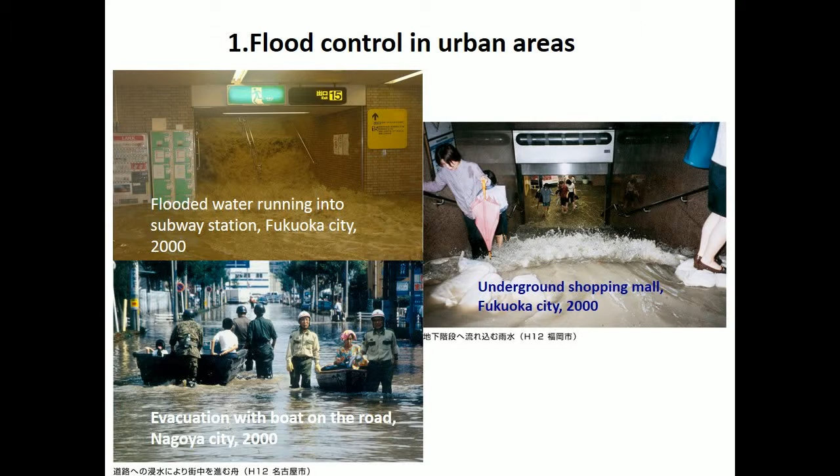In this video, you will find 9 major challenges and their solutions on wastewater works in Japan. The first challenge is the flood control in urban areas. These photographs show recent typical damages by urban floods. Underground facilities are easily damaged by floods, such as subway stations and underground shopping malls. Due to the increase in extreme weather events and in urban concentration, the magnitude of flood damage is rising.

Comprehensive measures are now being pursued to help the situation. They are a combination of structural, non-structural, and self-help measures. Structural measures include improvement of storm sewers, construction of storage, and infiltration facilities. Non-structural measures, as examples, are real-time flood forecast and flood maps for citizens. They work well with the self-help measures. They include voluntary evacuation and self-sandbagging around private properties.

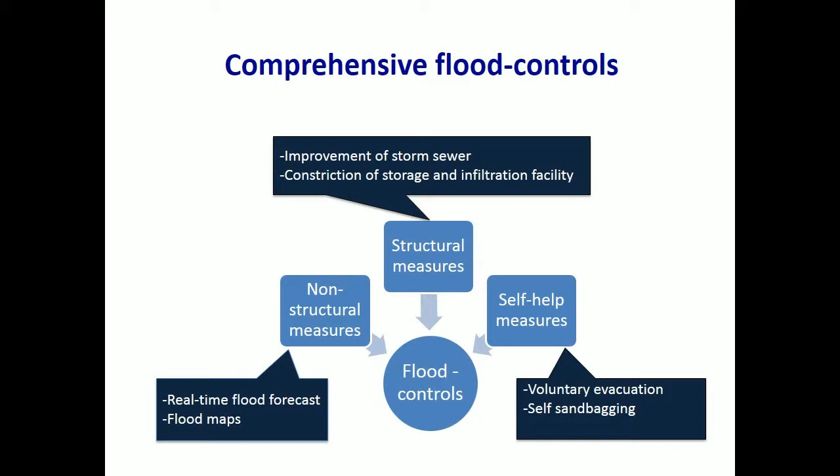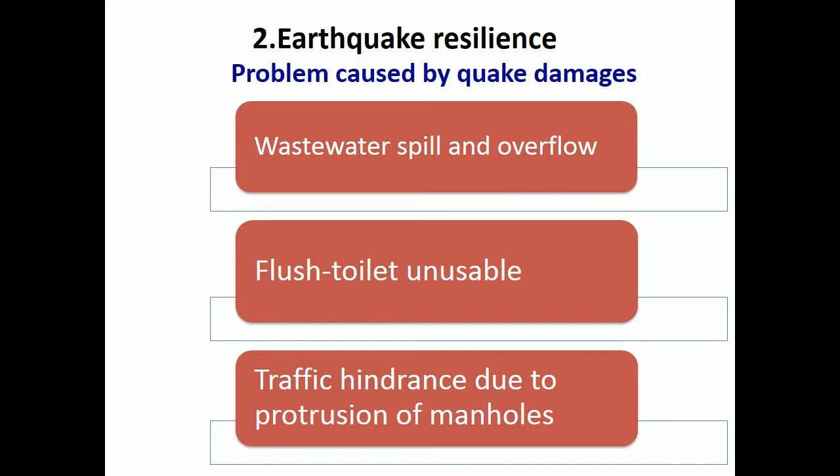The second challenge is the increase of earthquake resilience. Japan is prone to strong earthquakes. Once wastewater systems are damaged, the impact can be severe. For example, a damaged sewer system causes wastewater spill. It runs into residential areas or public water bodies. The situation poses serious threats to public health and sanitation. Also, broken sewers make flush toilets unusable. This leads to severe impact on the health of survivors.

Liquefaction is a common phenomenon after the quake. Manholes protrude on the road surfaces. This results in severe disruption to road traffic. Emergency vehicles are affected right after the quake.

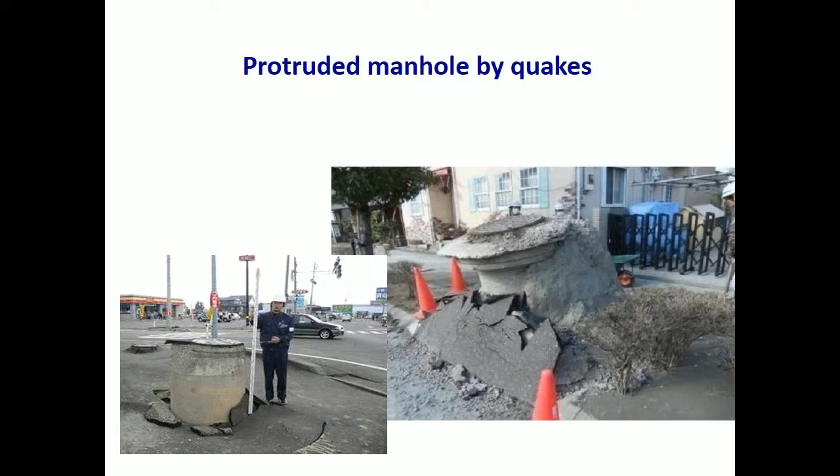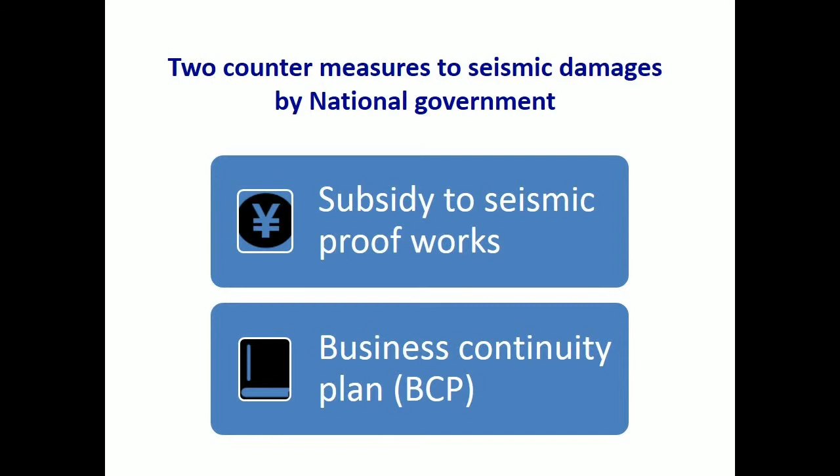For all these reasons, wastewater systems need to be earthquake-proof. The national government is implementing 2 measures to achieve this. Firstly, they provide wastewater utilities with subsidies to fund the quake-proofing works. Secondly, they suggest each utility make a Business Continuity Plan (BCP). It is designed to ensure quick restoration of essential functions of wastewater service.

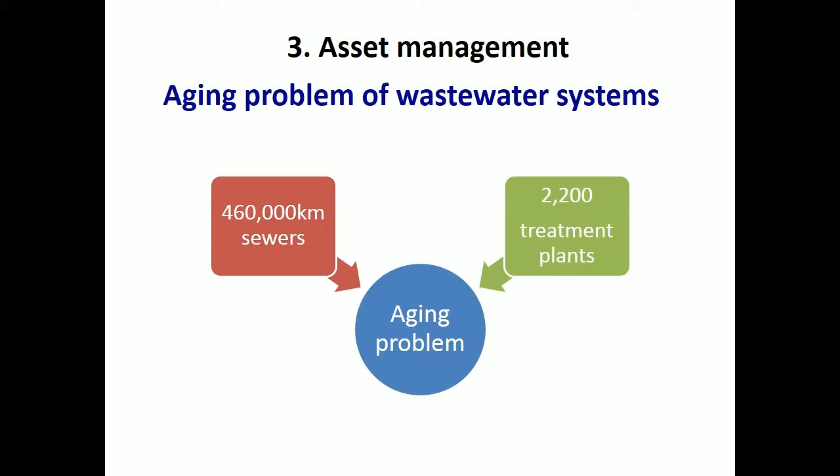The third challenge is implementation of asset management. A total of 460,000 kilometers of sewers and 2,200 treatment plants have been built. Those huge assets continue to age. The failure of aged facilities will pose a serious problem soon, if unaddressed. It is reported that around 4,000 sinkholes are caused by failed sewers every year. These photographs are the examples in the downtown of Tokyo.

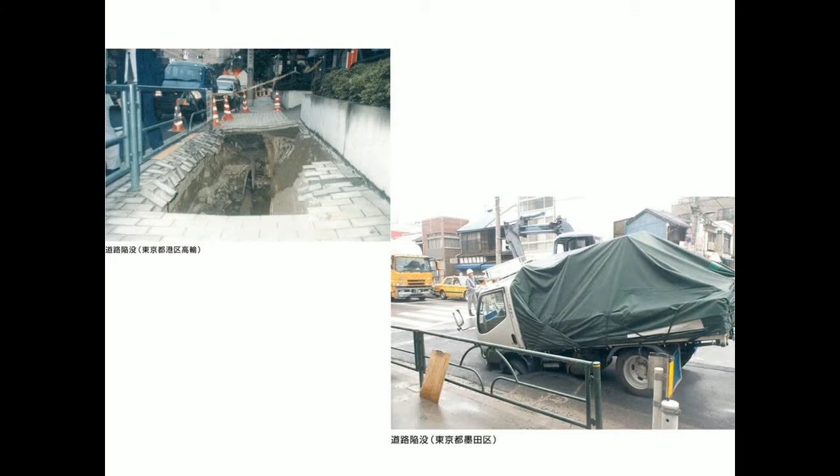To improve this situation, the next 3 points are emphasized. First is preventive maintenance. Second is condition assessment. Third is renovations based on long-term planning. In relation to the preventive maintenance, in 2015, the sewerage law was amended to ensure proper sewer management.

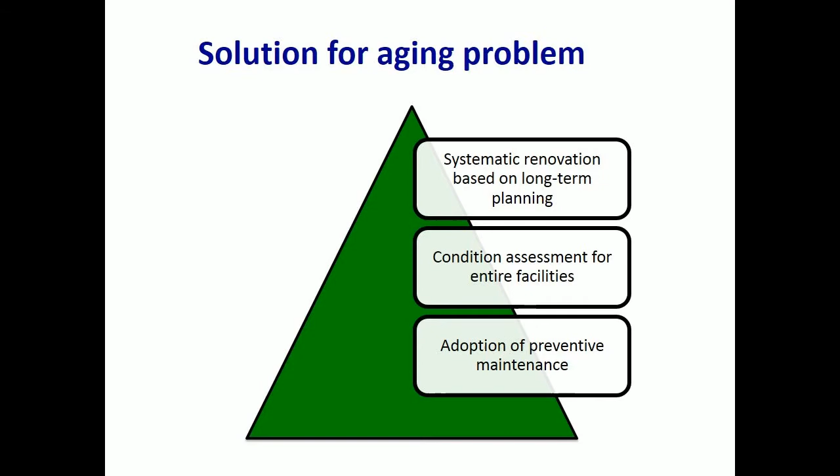The fourth challenge is eutrophication in stagnant coastal and freshwater bodies. The water quality in public waters has steadily improved in rivers or running waters. But there still remain the problems of eutrophication in stagnant waters. The pollution is observed in the bays that Tokyo, Nagoya, and Osaka face. Lake Biwa and Lake Kasumigaura, the 2 biggest freshwater lakes, are also eutrophicated.

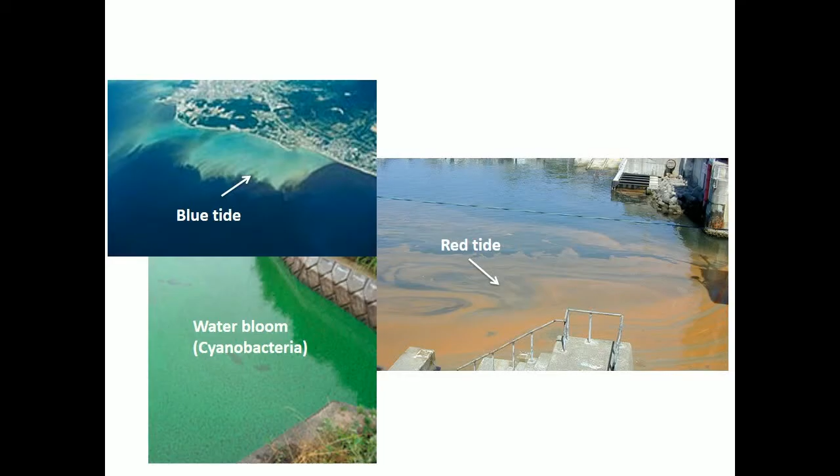These pictures show the consequences of eutrophication: the red tide, blue tide, and water bloom. They severely impact fisheries, ecosystems, and scenic beauty. To halt the eutrophication, nutrient removal is necessary at treatment plants. But the implementation is slow, particularly in the watershed of Tokyo Bay. To expedite the solution, the national government has recommended 2 measures. Firstly, phased introduction of nutrient removal processes. Secondly, joint actions with other concerned offices.

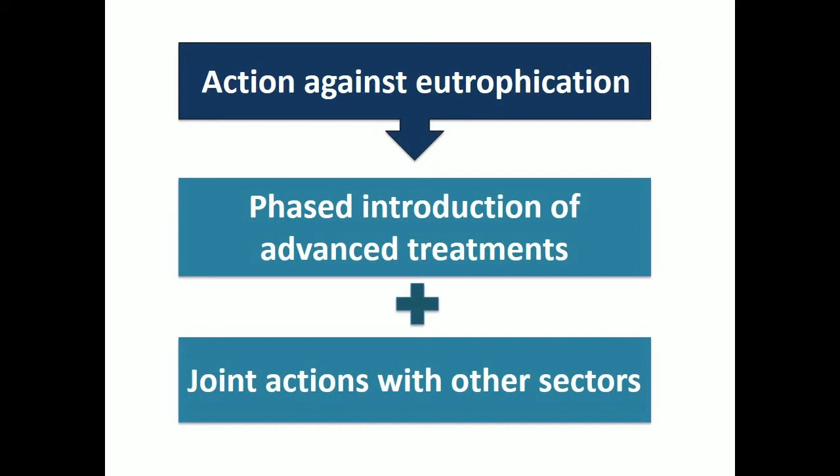This slide shows an example of phased introduction for a nitrogen removal process. It makes minor modifications to an existing conventional activated sludge system. As a tentative treatment method, it utilizes the extra capacity of existing facilities with minor upgrades.

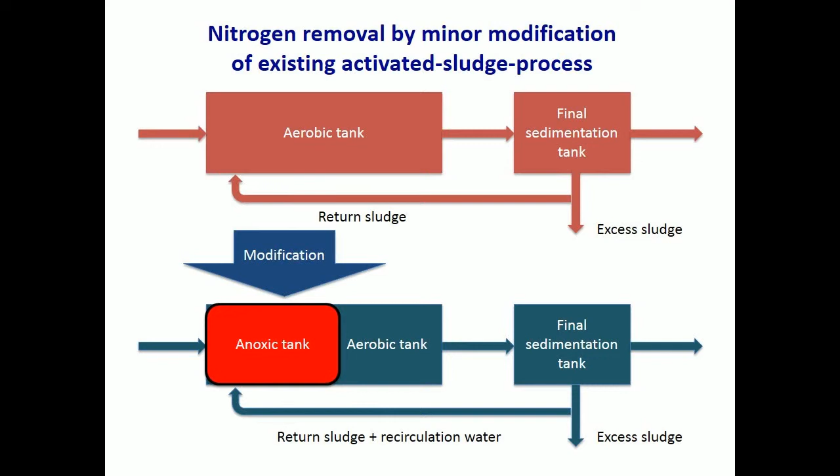The second solution is cooperation with the related government offices. Alleviating eutrophication needs to involve not only wastewater operators, but authorities of other dischargers on point and non-point sources. Especially, for the control of non-point sources, the involvement of the government offices of agriculture and forestry is essential.

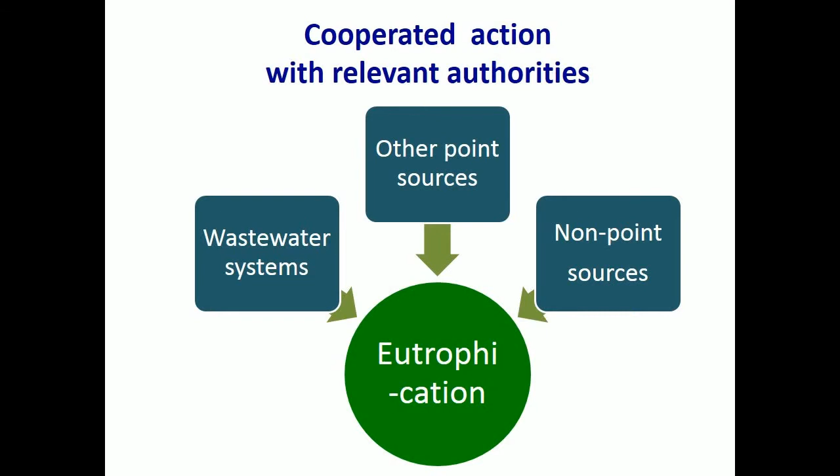The fifth challenge is restoring waterfront. Over the decades, waterfront in urban areas has diminished. The main reason is the loss or reduction of running water from urbanization. The decreasing pervious areas, conversion of urban streams into culverts, and climate change in recent years are responsible.

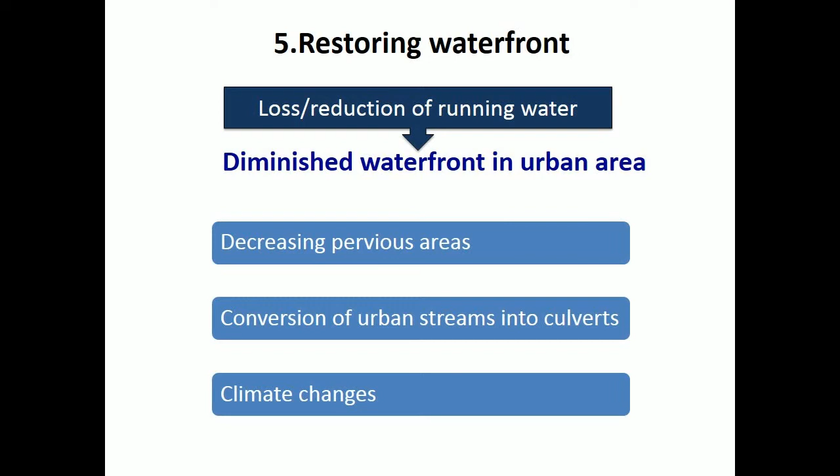To revive waterfront, 3 solutions are implemented to increase the flow of streams. First, the use of treated wastewater. Second, rainwater utilization after storage and infiltration. Third, revival and creation of waterfront with civic participation. Partnership with citizens from planning to operation and maintenance produces good results.

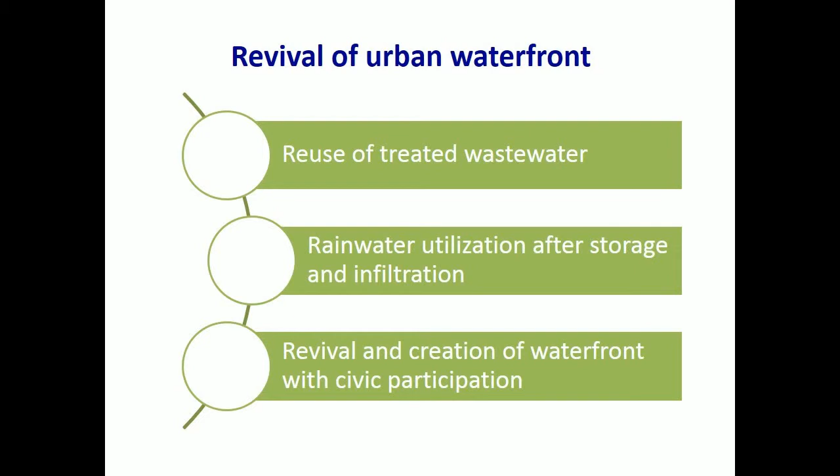The sixth challenge is the improvement of combined sewer systems. The combined sewer system is designed to convey sanitary wastewater and storm water in the same pipeline. It makes overflow of untreated wastewater when receiving heavy rainfalls. It has been used as a low-cost solution in urban areas. It serves approximately 25% of the population. But it needs improvement for protection of public health and clean water environment.

In 2001, oil balls drifted ashore at the Odaiba Marine Park and caught public attention. It is a very popular leisure spot in Tokyo. It was revealed by the media that they came from combined sewers. It resulted in a major social controversy. Since then, serious efforts have been made to improve the systems all over the country.

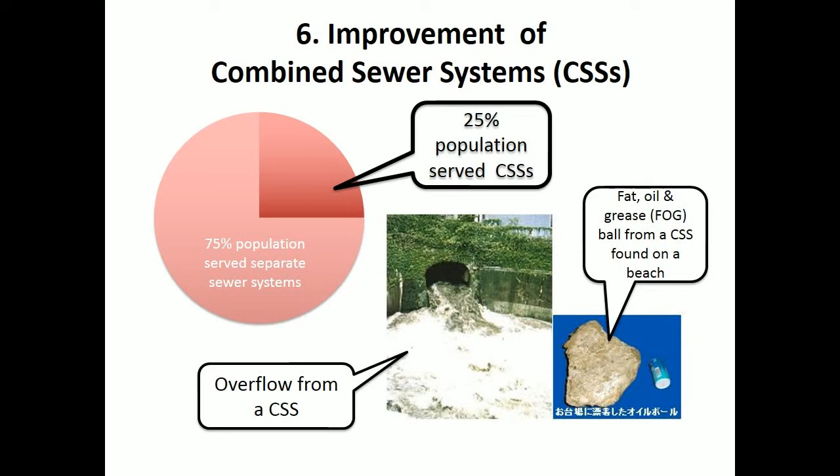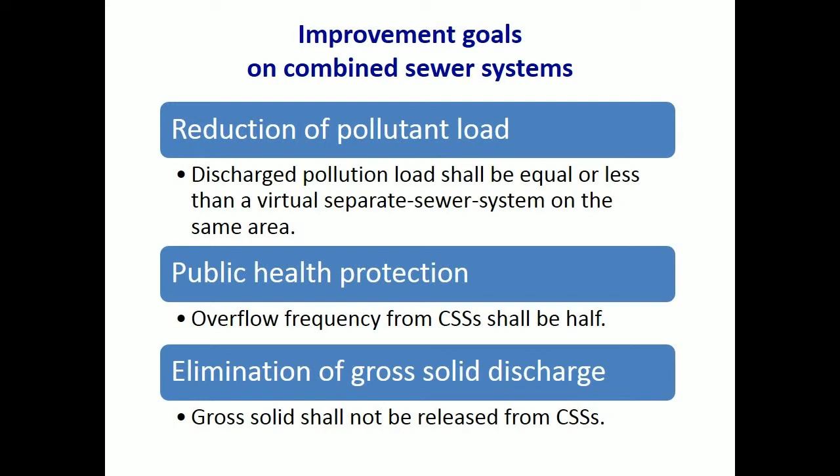The improvement of combined sewer systems has 3 policy goals. First, reduction of pollutant load. The total pollutant load from a combined sewer system shall be equal or less than a separate sewer system, in assumption for the same sewer district. Second, public health protection. The number of overflow events of untreated wastewater shall be cut by half. Third, elimination of gross solid discharge. Gross solids shall not be released to public waters from combined sewer systems.

In 2003, the sewerage law was amended to make the policy goals mandatory by specified deadlines. The deadline for small and medium-sized municipalities was set at 2013. For large municipalities, it was set at 2023. Up to now, 169 out of 170 small and medium-sized municipalities have completed their requirements. 2 out of 21 large municipalities have also completed improvements.

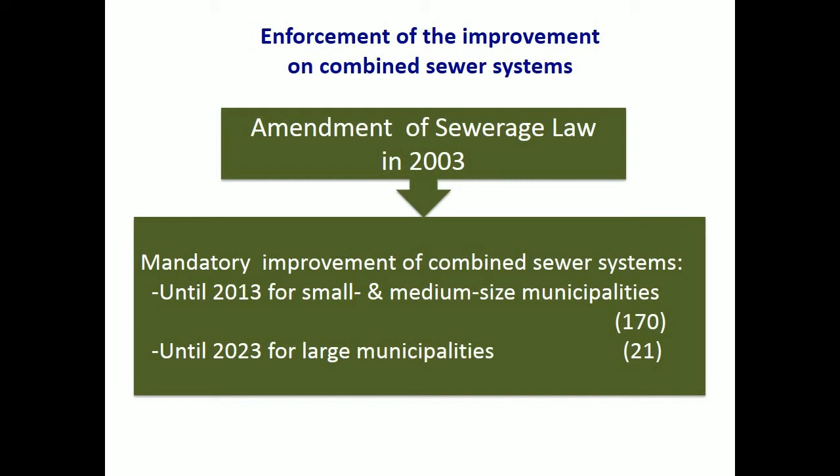The 7th challenge is expansion of service. Currently there are still around 14 million people waiting for access to wastewater treatment services. In these areas, untreated greywater is discharged directly to the environment. It is an urgent task to deliver wastewater service to these areas.

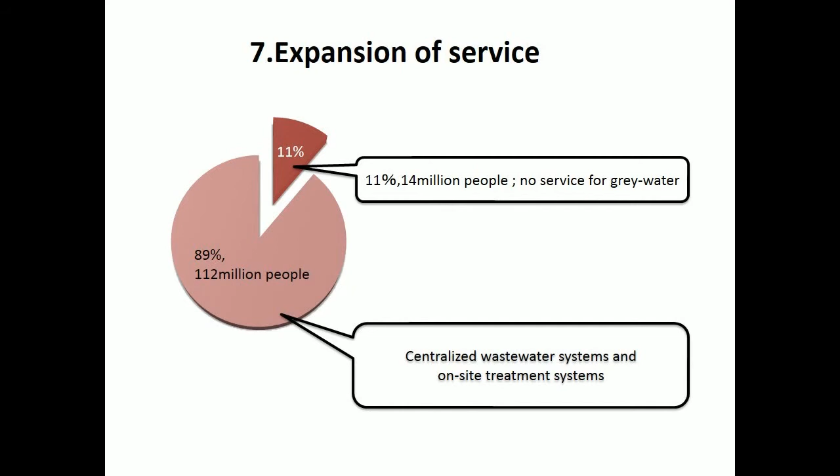To expedite the expansion of wastewater services, 3 solutions are ongoing. First, implementation of low-cost solutions, named Quick Project, being applied intensively. Second, investigation of new procurement methods, such as private finance initiatives, to construct and manage sewer systems. Third, revision of local master plans of wastewater services. The services switch to on-site systems from originally planned centralized systems in depopulated areas.

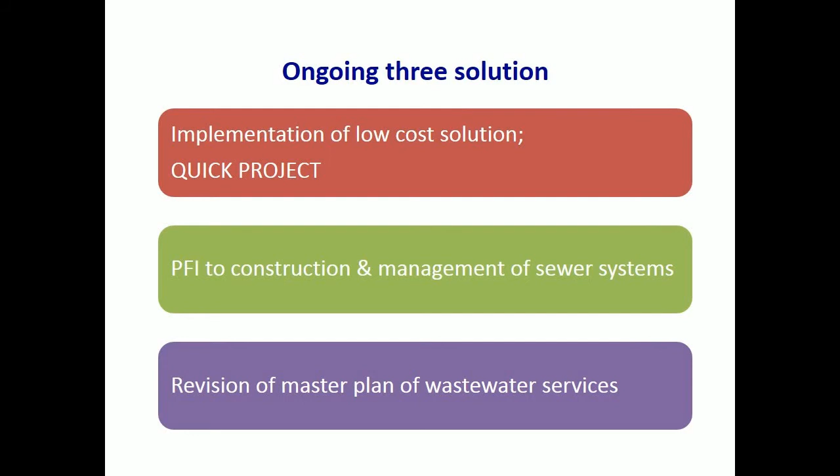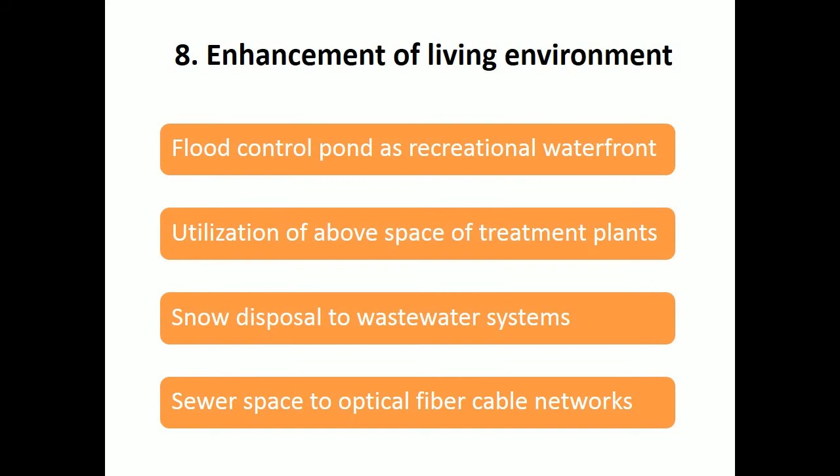The 8th challenge is enhancement of living environment using wastewater assets. Such examples are use of flood control ponds as recreational waterfront, utilization of the space above treatment plants as playgrounds, use of wastewater facilities to dispose collected snow, and installation of optical fiber cable in sewer lines. The photographs show a constructed playground on the treatment facility in Tokyo. In total, 369 treatment plants opened their above space for public use in Japan.

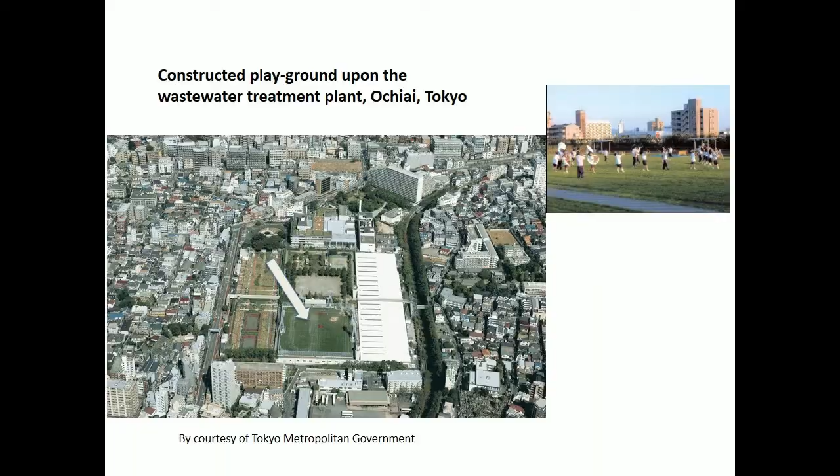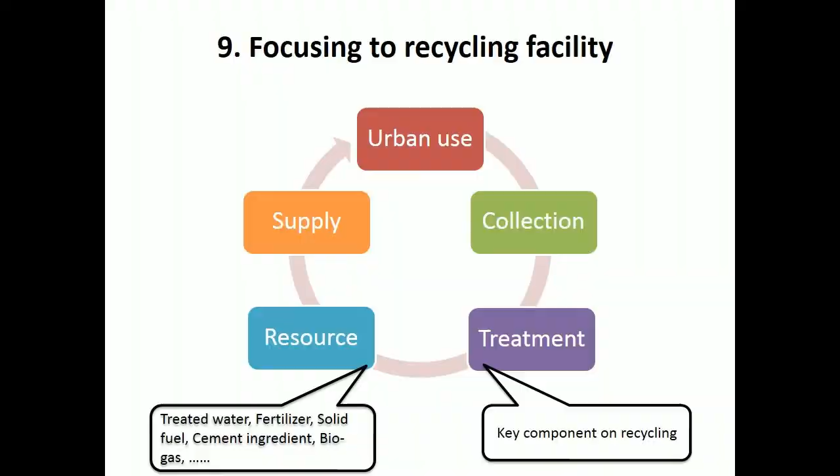Wastewater Works in Japan is trying to deliver the best service to customers while facing the 9 challenges. We continue to work for a sustainable society through wastewater service.